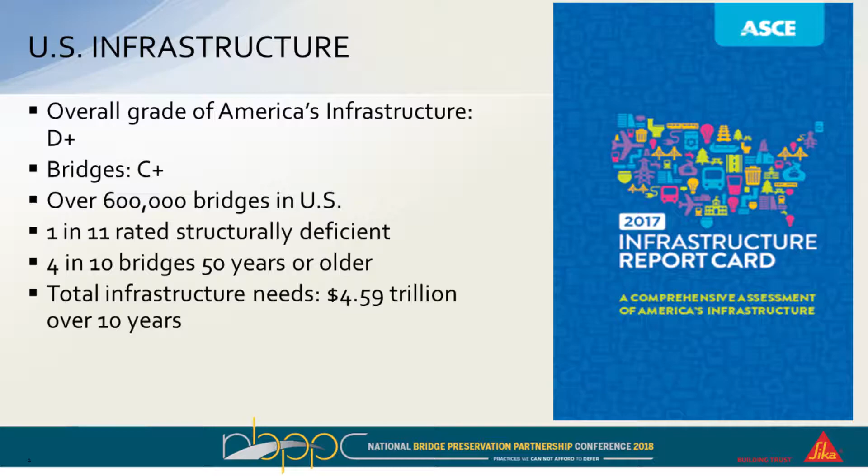The total infrastructure needs in the U.S. over the next 10 years is over $4.5 trillion. So even if we've been talking about the new infrastructure plan, which hopefully will turn into an infrastructure bill, even if it's at $1 to $1.5 trillion, that's still only about 25 to maybe 30% of what the actual needs are for upgrading our infrastructure. So it's important to keep in mind how much we actually need and how much money is being allocated for bridge repair.

So why do we need to strengthen structures? There could be many reasons for upgrading our existing inventory. You can start things with insufficient reinforcement. The root of a lot of the problems that we have in the U.S. and really around the globe is damage from corrosion: de-icing salts, marine salt environments, marine environments in general, and caustic chemicals in the atmosphere. That creates a lot of the problems, and from a lot of the presentations we've seen earlier today, you can see some of the damage that can occur.

Also, things like change in use. When our interstate system was designed and built back in the 50s, the size of the vehicles was much smaller and the traffic volumes were much lighter. Now we're putting a tremendous strain on our infrastructure, and we have to be able to keep up with the demands.

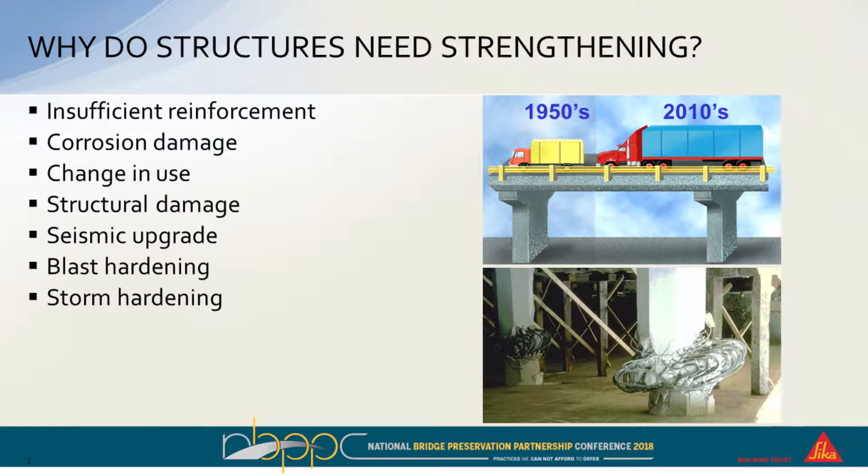And then things like blast hardening, things we never really thought about 15 or 20 years ago, are now an important aspect in bridge repair and strengthening. And with all the hurricanes, storms, and damage from Mother Nature, again, we can upgrade structures with the use of FRP materials.

So let's talk a little bit specifically about FRP repairs and some of the advantages. The big thing with FRP is that we can optimize the limited funds that we have. We can have some cost and scheduling benefits. The Federal Highway mantra is to get in, get out, and stay out. So get the repairs done in a timely manner and don't come back there in the future.

This all leads to reduced maintenance cost. The fact that we're using lighter weight materials, some of the traditional materials for strengthening, we're using concrete, steel, all the materials that are used to design and build bridges. Now we're using much lighter weight materials for upgrading them, so it puts less of a strain on our infrastructure.

The other big aspect of FRP materials is the fact that they are non-corrosive. So again, we don't have to worry about long-term maintenance. We know that these materials do not rust, they're inert, and they're essentially there for the life of the structure, again, leading to longer-term sustainable type performance.

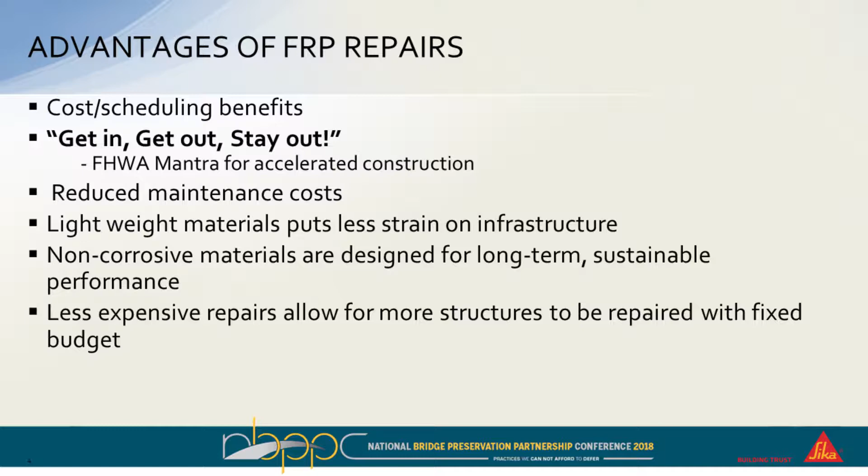And again, the fact that we can get in and get out faster means that we can allow for less expensive repairs, and then what that creates is the ability to repair more structures when we have a fixed budget, which is always going to be the case.

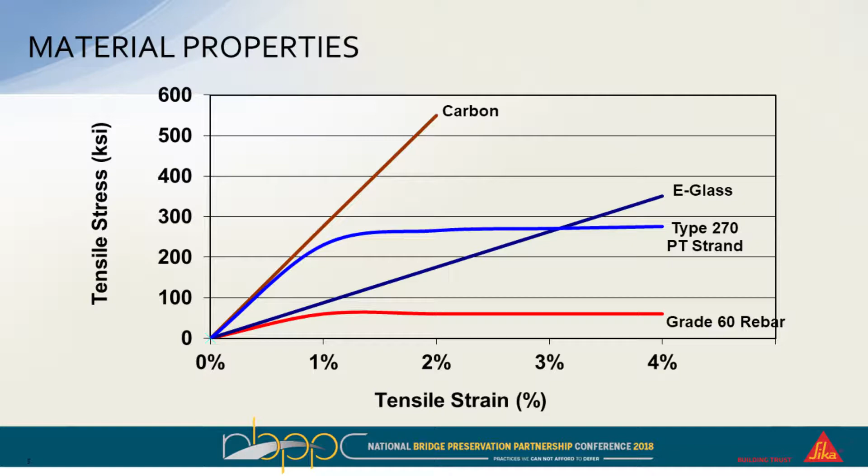So this slide just illustrates the comparison of some of the use of FRP materials with the conventional types of reinforcing steel or post-tensioning strands. Important to note, these material properties, at least for the carbon fiber and the glass fiber, are just the fiber properties, so it's not the cured laminate properties. But the point here is that we can use materials that have a much higher tensile capacity when compared with conventional steel, but also allow us to optimize the strength of these types of materials.

Kind of a rule of thumb, it's not exactly the case, but you can think, especially with carbon fiber, they're about, say, 4 to 5 times stronger than conventional steel, but they're about 1/4 to 1/5 the weight. So that strength to weight ratio is really one of its biggest attributes in addition to the corrosion resistance.

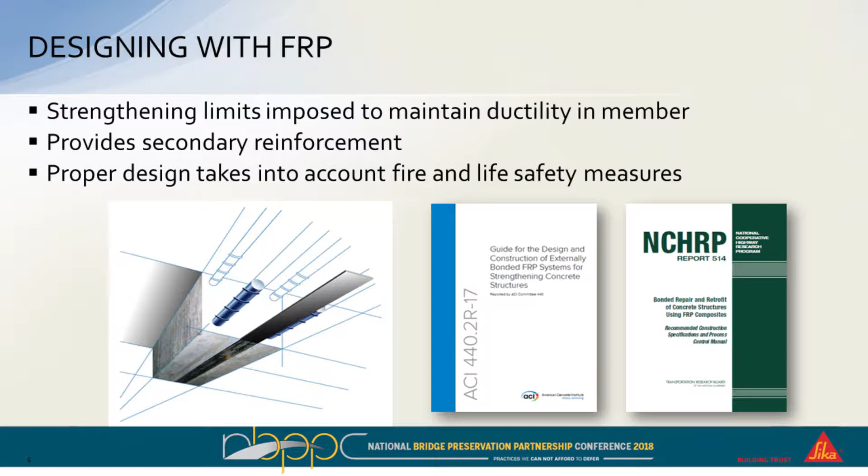When we design with FRP, we have to also take into account that we're working with different types of materials. They don't have quite the ductility that steel does, so we have to make sure we impose strengthening limits on them to maintain a ductile nature of the overall structural member. Also make sure that we're designing to provide some type of secondary or supplemental reinforcement, so it's used in conjunction with the existing concrete and steel that's already in place, and also take into account any fire, life safety issues. Especially, this is probably more the case for occupied buildings, but certainly on bridges as well.

We want to make sure that we're designing in accordance with local safety codes. And there are national design guidelines that are in place. American Concrete Institute has a Committee 440, which has a number of documents that have been published for almost 20 years now on the use of externally bonded FRP materials. And then Federal Highway and NCHRP have put together a number of documents and specifications for the bridge owners and for the specifier in order to create design documents.

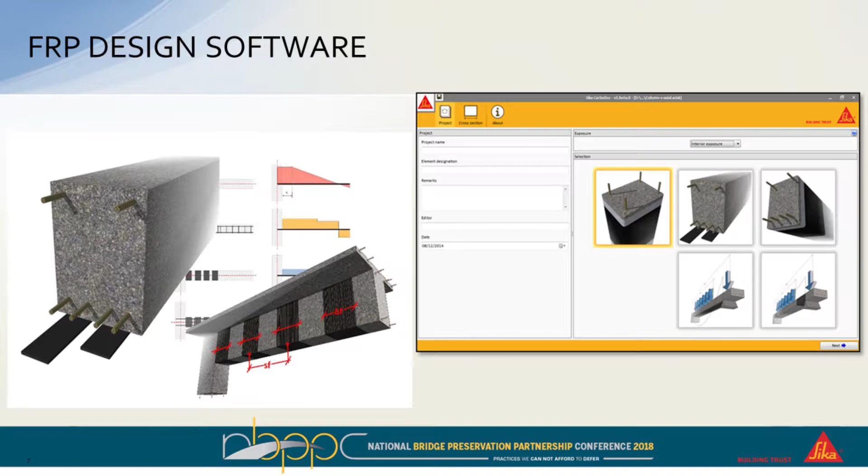For FRP design software, you can take the materials that are in the published guidelines, for instance from ACI 440, and actually put them into design software packages. So these are available from a lot of the manufacturing companies that market and sell the materials. A lot of these materials are available, again, from the various companies that are actively involved in supplying materials.

So let's talk a little bit about the evolution of structural strengthening, because it has gone through a number of changes over time, and from when it was first done. If you think about strengthening existing structures, steel plates have been used for over 50 to 60 years. Actually, there have been case studies that go back to the 1950s, so almost 70 years ago, where steel plates were either epoxy bonded or bolted onto beams, slabs, even column jacketing, again for stiffening and upgrading existing structures.

This was replaced over time, but really in the early 1990s is when the use of carbon fiber and FRP materials first came to prominence, at least in terms of a commercial aspect. And here you can see some carbon fiber plates that were used, again, for flexural strengthening back in the early 1990s. Then glass fiber wraps were used for a lot of seismic strengthening, also in the early 1990s, and Caltrans is one of the early proponents of this for replacing steel jacketing, again for seismic upgrades.

Some of the early systems were done with what's known as a wet layup process. I'll show you in a few seconds what we mean by a wet layup.

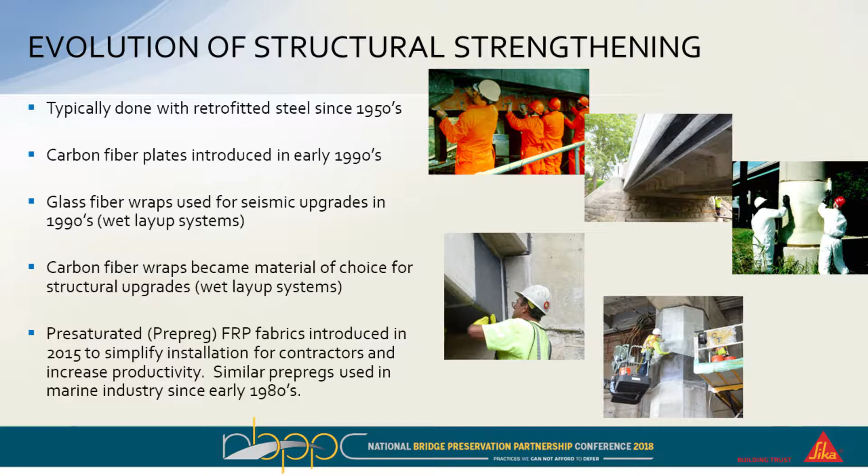And then more recently, the advent of pre-saturated or pre-preg FRP fabrics were really just introduced for construction applications really less than about 2 to 3 years ago. These similar types of systems have been used in other industries for many, many years. In fact, the marine industry has been using them since the 1980s, and some other industries have actually going back even prior to that.

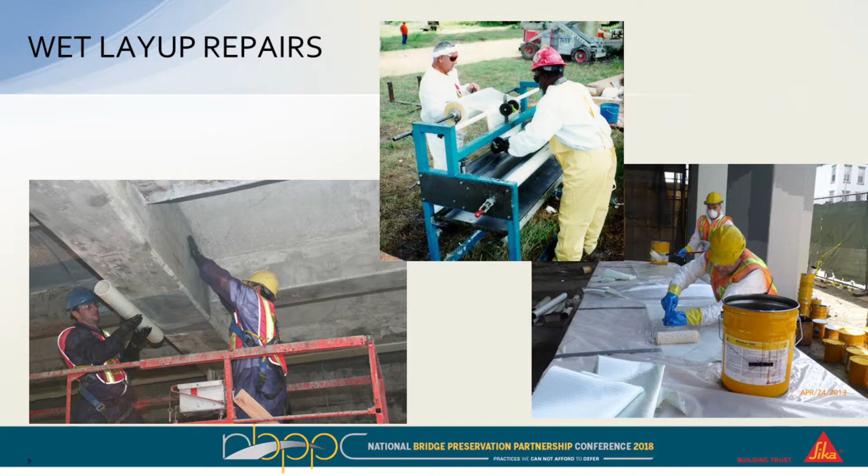So I'll get into sort of the differences between the wet layup and the pre-sat in a second. So again, if we look at what a wet layup process is, essentially what we have is a dry fabric and a wet resin, typically an epoxy resin, and then we combine them together to create a composite system or a composite fabric. So in this case, we're combining a glass fabric with an epoxy resin, and typically it's done either on a flat station where you're actually forcing the resin into the fibers, or in some cases we can actually use equipment that's sometimes referred to as an impregnator or saturator and sort of force the resin onto the fabric.

So this is all done on site to create that composite laminate system between the FRP, between the epoxy and the fibers. The difference between that and what's known as a pre-preg or a pre-saturated system is that the pre-pregs are reinforced fabrics that have been pre-impregnated in the factory, sort of in the manufacturing environment. So again, these have been used in other situations. You can see the aerospace industry has been using them for many years for constructing the fuselage and other parts of the airplanes. Military has been using these materials for many years. Again, the main difference or the advantage of a pre-saturated system is that it eliminates that step out in the field for wetting it out. It's all done in advance.

Typically, the resin that's used is what's known as a B-stage epoxy, which is a partially cured resin. Okay, because what you don't want is you don't want the resin to start curing before you need it. It has to remain pliable, and then it has to cure in the shape that you want it to cure in. So what that typically has meant is you have to keep it somehow cool, either in refrigerated trucks, keep it refrigerated right before you install it, and then you have to put some type of heat to it to make it kick off and to cure.

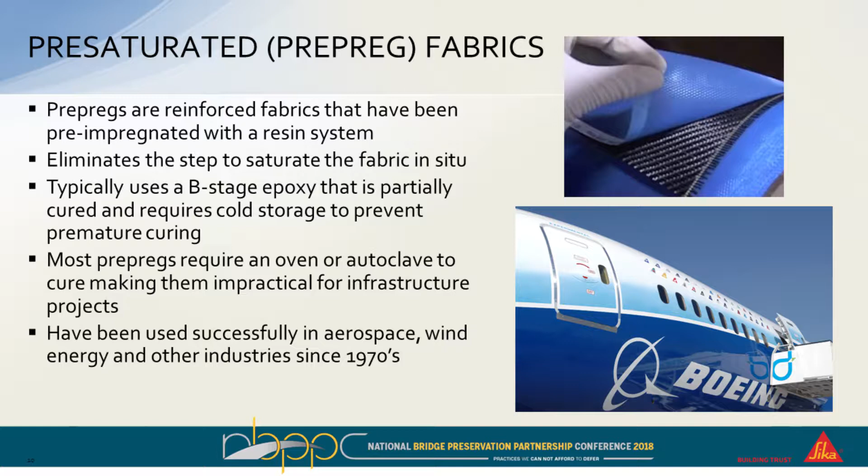So that's why it's typically used in more of a controlled condition, like a manufacturing environment or places where they actually manufacture planes, where you have the room to put an oven or an autoclave. And that's really the main reason why these have not been used too extensively in infrastructure applications, because it's very cumbersome, obviously, to bring out heating equipment or autoclaves out on a bridge column. So that's why they have not been used quite often in bridge applications. But they have been used successfully in aerospace, wind energy, other industries since the 1970s.

So if we look at the use of pre-saturated fabrics for civil engineering or bridge applications, now what we can put together is an improved quality control, something that's manufactured in an ISO 9001 facility under controlled conditions, optimized resin to fiber ratio. So again, we're not relying on the contractor to mix up so much resin and apply so much fabric. It's all done sort of in a controlled condition under optimized conditions. The fact that you can do this without having to make the contractor mix up the epoxies and actually do the saturation on site, it not only makes it a better quality system, but it also improves the productivity. They can do it a lot faster. The pre-saturated fabrics are much easier to cut because they get less fraying since they have the resin already built into them. They can also be air freighted.

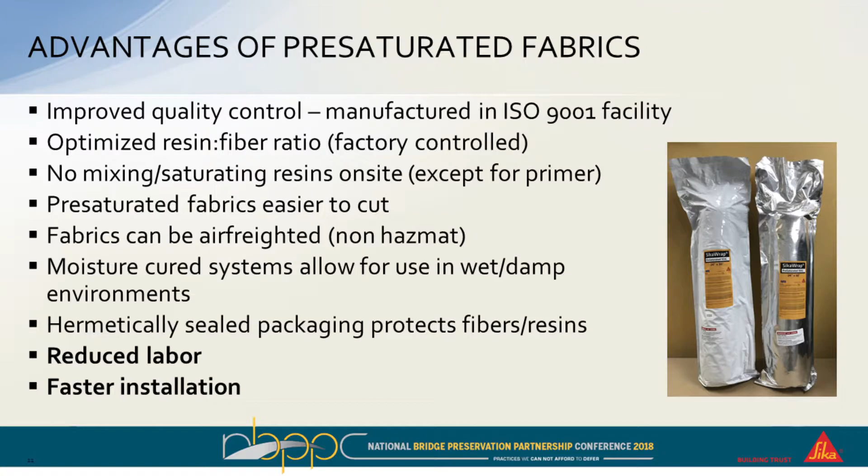They're non-hazmat material. The difference between the B-stage epoxy that I mentioned earlier and the ones that are now used for bridge applications is a different resin type system. So in this case, what we're using is a moisture-cured resin that allows it also for use in wet or damp conditions. So, in order to prevent it from curing prematurely, it gets packaged and shipped in hermetically sealed pouches or foil packs to keep the moisture out of the package until you open it up. Once you open it up, it gets exposed to the ambient relative humidity, and that's when the curing process will actually start.

Very similar to moisture-cured resins that are used for construction joint sealants and all types of waterproofing systems as well. Essentially what we end up with is something that can be done with reduced labor and also with a faster installation. So the moisture-cured urethane is the saturant. Again, no refrigerated storage or transit required, no equipment to heat it. It cures at ambient conditions, so you don't need it.

Basically, it'll go anywhere from about 40 degrees Fahrenheit up to about 120 degrees Fahrenheit. So you have a very wide range of temperatures that it would work in. Repeatable strength due to the consistent resin to fiber ratio. Installations available, like I mentioned, even in very damp conditions or saturated concrete conditions.

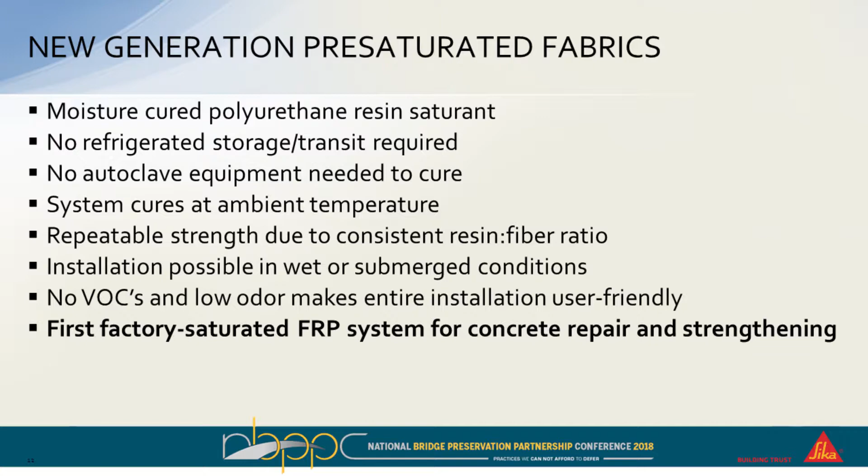Oftentimes with epoxies, you want to wait until the concrete has dried out so you get a better bond. Since this is a moisture-cured system, it actually will bond very well even to damp concrete. No VOCs and low odor make them user-friendly. And also the fact that this is the first factory saturated FRP system that's in use for concrete repair and strengthening.

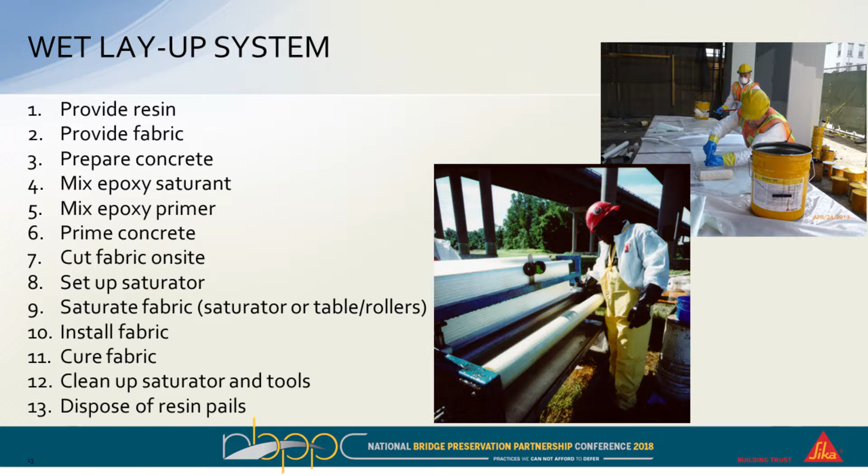So here are the typical steps that take place in a wet layup system, and it's a very linear progression, multiple steps, and you really have to make sure the contractor gets trained and goes through all these steps, from providing the resin and mixing and saturating and cutting the fabrics. I'm not going to go through everything, but the point here is there's a lot of steps that have to take place, and if you cheat on one step, that can compromise the entire system.

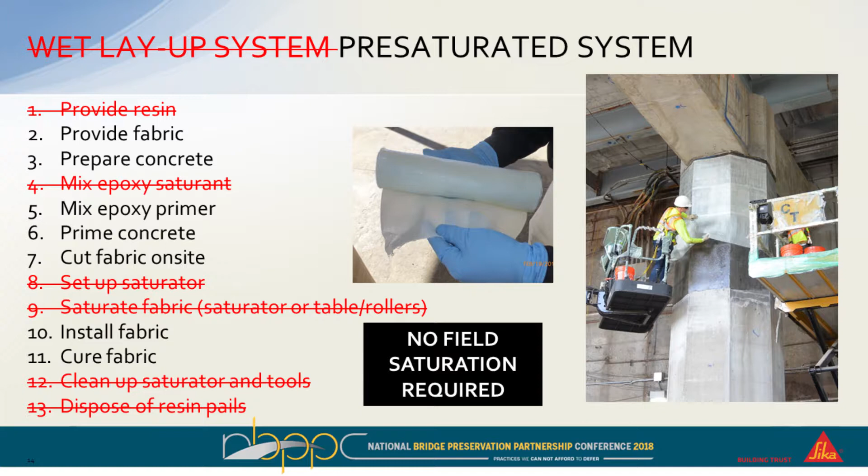So again, if we compare that to a pre-saturated system, what it allows us to do is cut out about half of the installation steps. The biggest time saver is really the mixing of the epoxy resin and the actual saturation of the fibers. That's the part that probably consumes at least half of the installation time, even before you bring it out onto the column and actually start wrapping it.

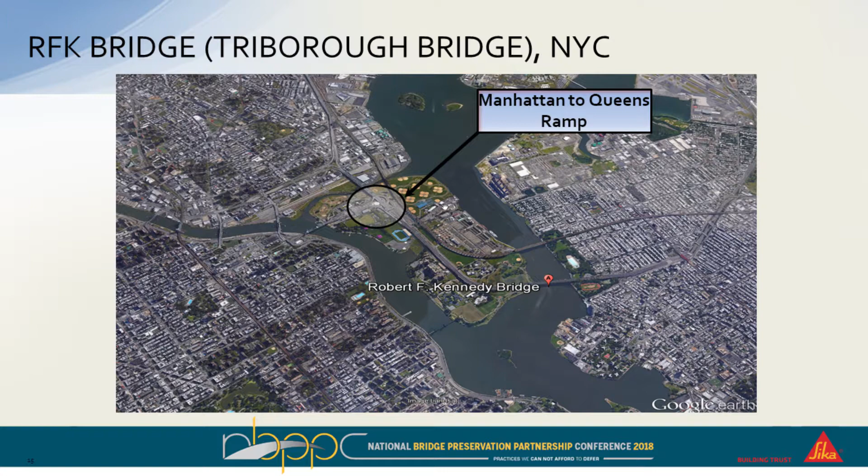So I'm going to go through just a couple of case studies and try to show you some examples of where these materials have been used over the last 3 years. This is an example of the RFK Bridge, which was formerly known as the Triborough Bridge in New York City. It's a series of 3 bridges that connect Manhattan, the Bronx, and Queens, but the landing spot for the 3 bridges is actually right in the middle on Randall's Island.

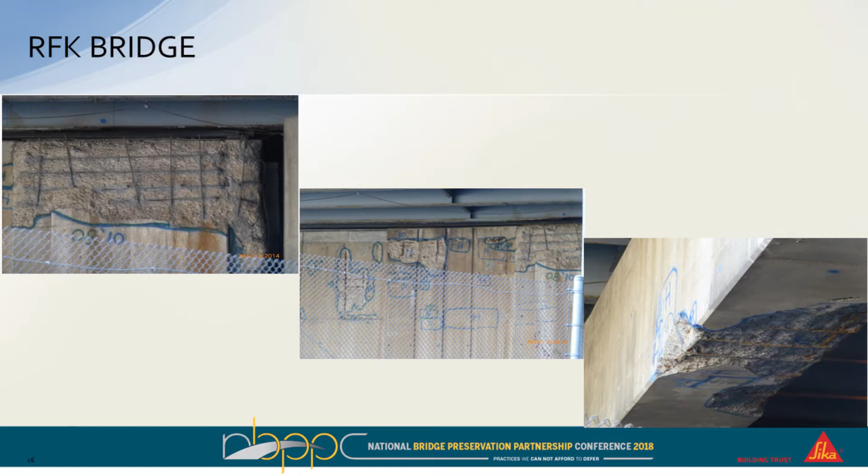This complex opened back in 1936, so it's been around for over 80 years now, and there's been quite a bit of concrete deterioration, a lot of de-icing salts, corrosion damage that has taken place. So the purpose here was to do a lot of concrete repair and patching, and then also provide an FRP glass system for confinement. They didn't want to have to come back and work on these patches again in the future. So this was not necessarily a strengthening application, but really more a confinement for the patches.

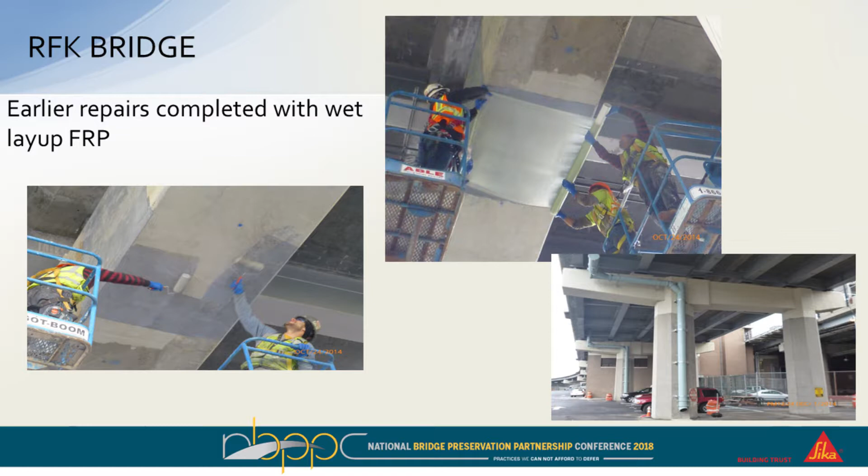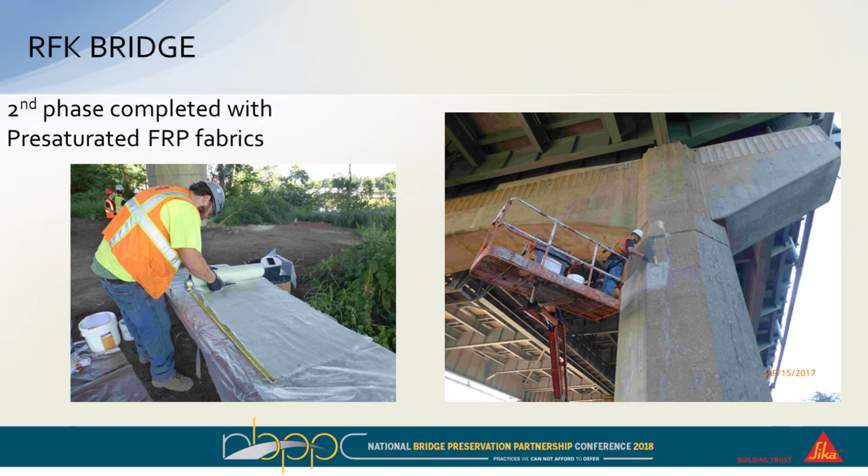So here you see, originally, the first phase of this project actually used the wet layup system. Here's an example of the concrete being primed. The fabric, which has already been saturated, is being laid up on the underside of the girders, and then finally it gets coated. So this was the first phase. The second phase was done with a new contractor where they actually utilized the pre-saturated systems. And again, here you can see them opening up the foil, cutting it to length.

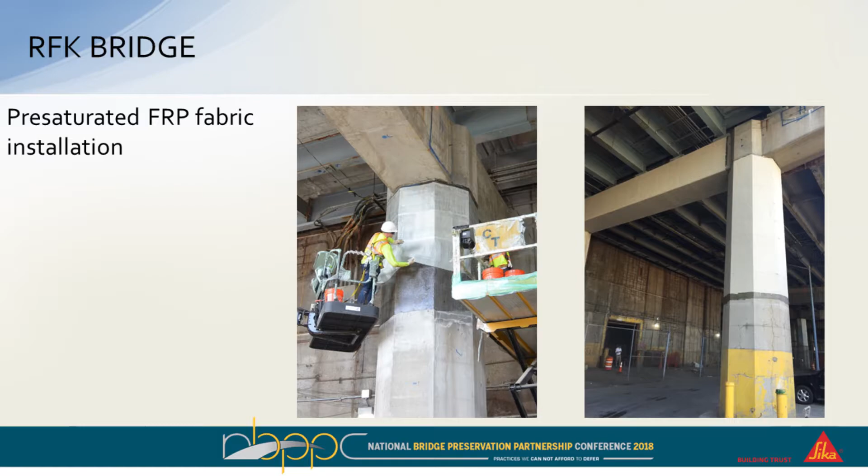After priming the concrete, you lay it right up onto the concrete. Here you see them working off a couple of scissor lifts. In this case, the work crew is really only 2 people because you don't need anyone, again, mixing and saturating. So essentially you just need the guy cutting it to size and bringing it up onto the lift and wrapping it around the, in this case, the column. And the right picture is where they put the protective coating on for UV protection.

Two other projects were done. These were a little bit different. This is an I-15 bridge in Pocatello, Idaho. This one was damage from an overheight truck, a high-load truck. Again, a lot of damage was done to some of the strands. And in this case, they used a carbon fiber system because they had to restore some of the structural integrity of the material. The advantage of the pre-saturated system here is they had a very limited time to work with the materials.

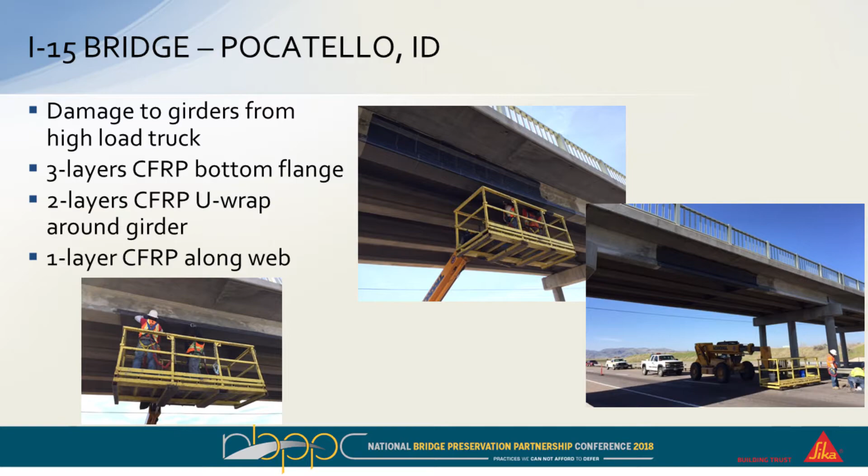They didn't want to shut down the bridge for too long a period of time, so they can essentially get this done in probably about 6 to 8 hours total. The design for this was 3 layers of the FRP on the bottom, 2 layers as a U-wrap, and then 1 additional layer along the web. That was to restore the strength that was knocked out of the strands.

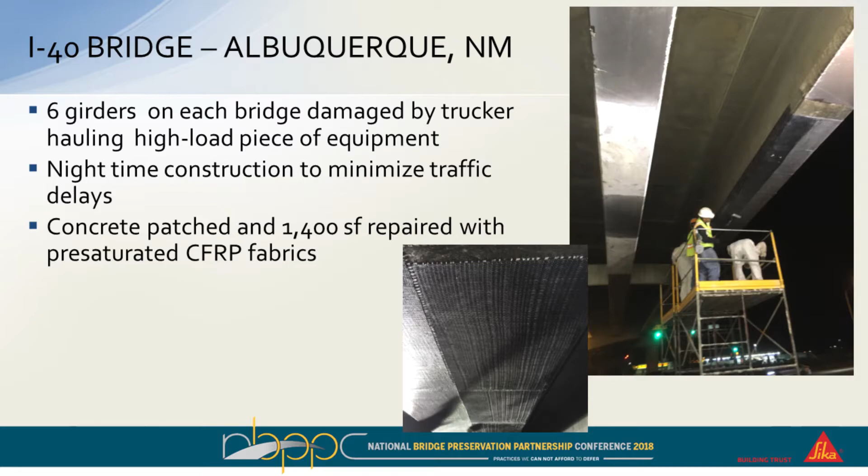And then a similar application on the I-40 bridge in Albuquerque, again, a high load piece of equipment struck the underside of the girder. In total, 6 girders were actually affected by this one. Here, the New Mexico DOT wanted all this done as nighttime construction, again, to minimize delays. And again, about 1,400 square feet of concrete was patched and then strengthened with the pre-saturated FRP materials.

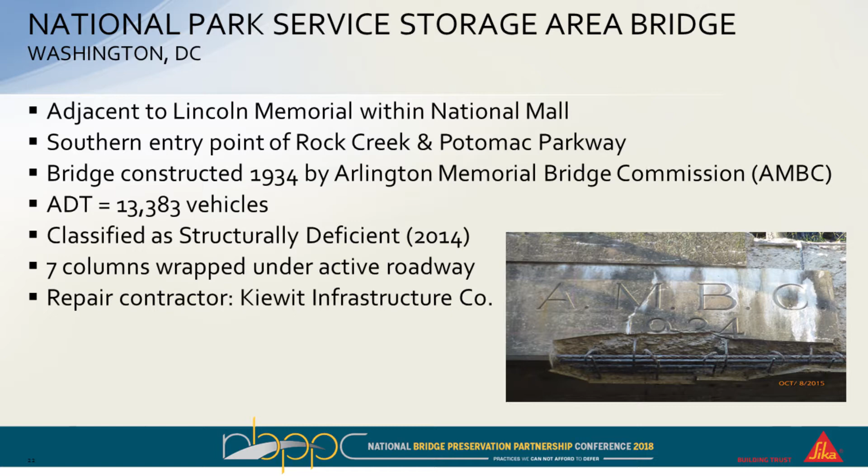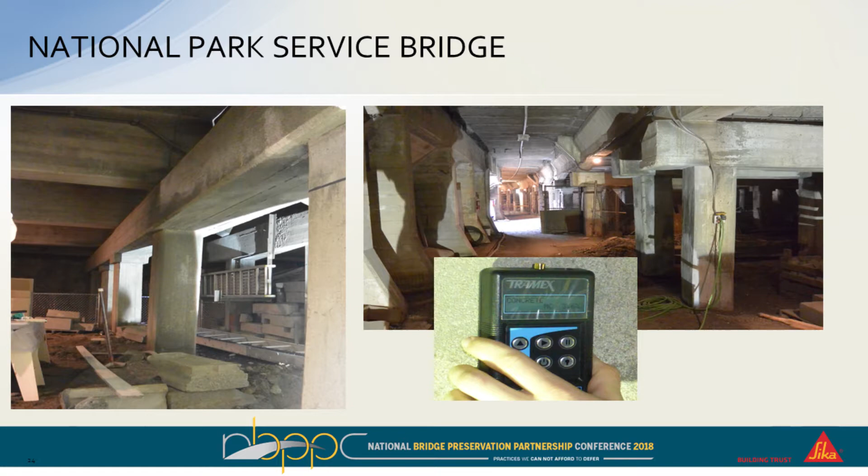Here you have a moisture meter to measure the moisture content in the concrete. Typically, if you're over about 4% moisture, that's when you don't want to use epoxies. You want to either dehumidify it or wait for it to dry out. In this case, they were able to get onto it because they had no moisture issues with the moisture-cured resin.

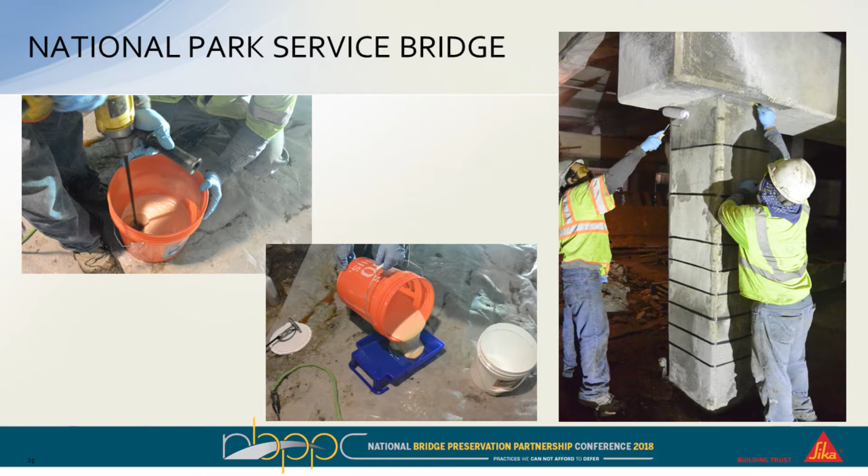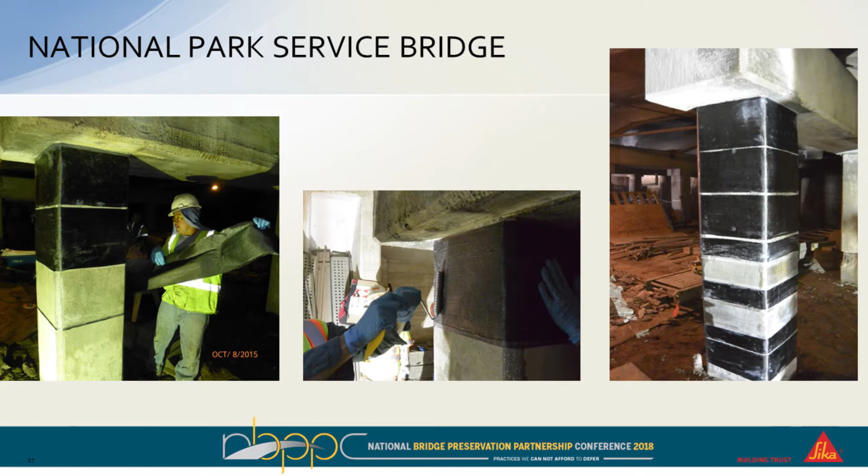Here you see the application of the primer onto the concrete. Here's the FRP that was applied in the bags. The contractor is literally just cutting them into strips and then wrapping it around the column. Again, you can see the workforce on each column is only about 1 to 2 people because it's a very simple process, wrapping it and then just using some type of fiberglass rib roller to smooth it out.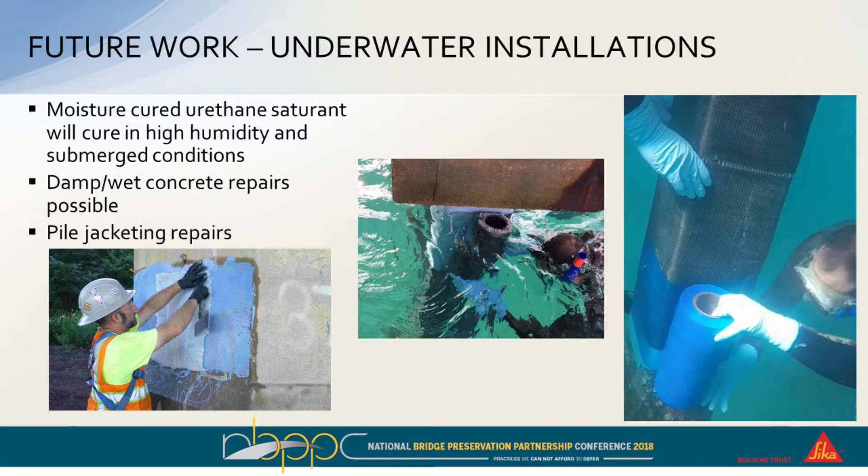And then finally, some future work. Since we have moisture-cured resins, we can also now look at the use of these materials for underwater or completely damp or even splash zone applications. So the moisture-cured urethane resin, we know it will cure in high humidity and submerged conditions, also for damp or wet concrete repairs, and also for use in pile jacketing, which is another big application either on concrete or timber type piles.

So in conclusion, our U.S. infrastructure is literally crumbling before our eyes, in critical need of repair. Again, extending the service life of our existing bridges is one of the key elements of sustainable repairs. FRP composites have been used successfully on really thousands of projects around the globe for close to, I would say, about 25 years in service life.

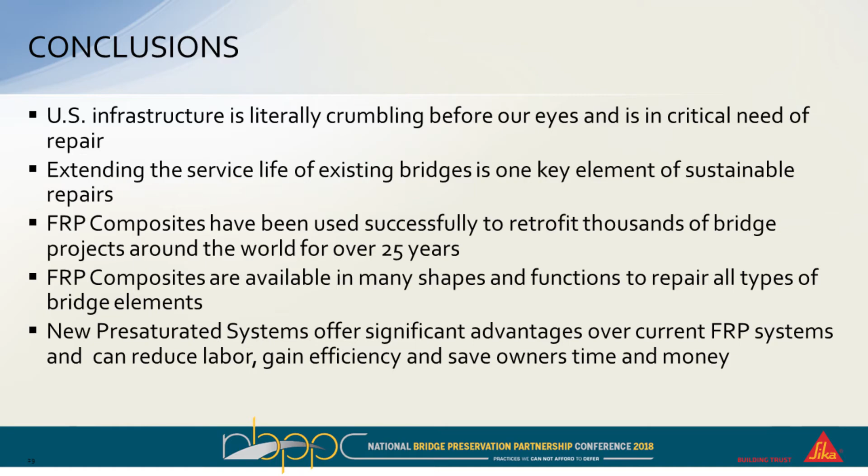And the fact that FRP composites are available in many shapes and functions allows us to repair just about any type of geometry that's out there. And the use of these new pre-saturated fabrics offers some significant advantages over the current wet layup systems, can reduce labor, gain efficiency, and save owners labor, time, and money.

First, what kind of surface prep prior to applying any of the materials do you do to concrete? And second, do you see local owners being able to use this with their own forces, or is this more a contractor specialty? So as far as the surface prep, the ACI 440 guidelines go into some detail on what's the adequate or the recommended surface prep.

ICRI, which is the International Concrete Repair Institute, has what they refer to as surface profile chips. So generally you're looking for something like a CSP 2 to 3, which is almost like a rough sandpaper finish. You're trying to mechanically abrade the concrete, roughen it up, and get rid of any weak concrete on the surface, any paints, graffiti, things like that. You don't have to get more aggressive than that. If you were doing a concrete patch, you would probably need to expose some of the aggregate, but really you're just abrading the surface with some type of mechanical shot blast, sandblast, or abrasive grinders.

As far as the repairs, on larger projects, obviously, you're going to probably work with specialty contractors that have been trained. But we have trained some of the maintenance crews on smaller bridges so that they can go out, whether it be for emergency type repair or maybe some spot repairs. So it's certainly something that with the proper training can probably be done by a maintenance crew on a smaller scale basis.